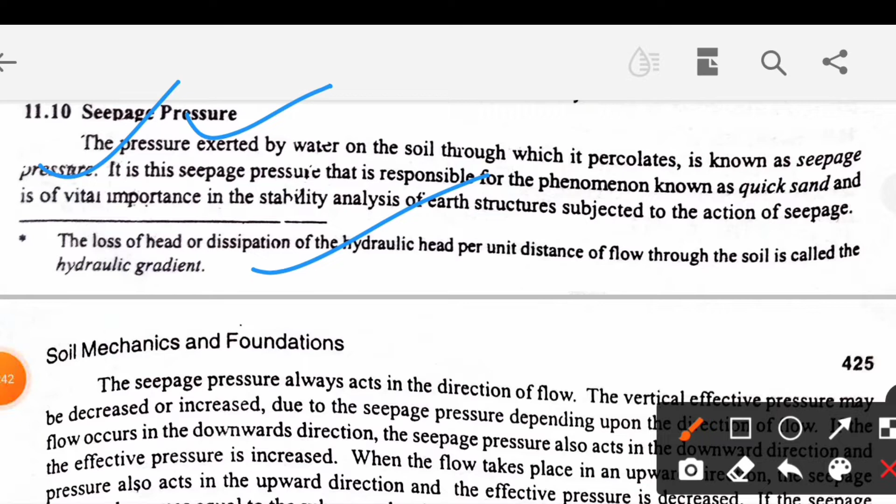The loss of head or dissipation of the hydraulic head per unit distance of flow through the soil is called the hydraulic gradient. The seepage pressure always acts in the direction of flow. The vertical effective pressure may be decreased or increased due to the seepage pressure depending upon the direction of flow.

If the flow occurs in the downward direction, the seepage pressure also acts in the downward direction and the effective pressure is increased. When the flow takes place in an upward direction, the seepage pressure also acts in the upward direction and the effective pressure is decreased.

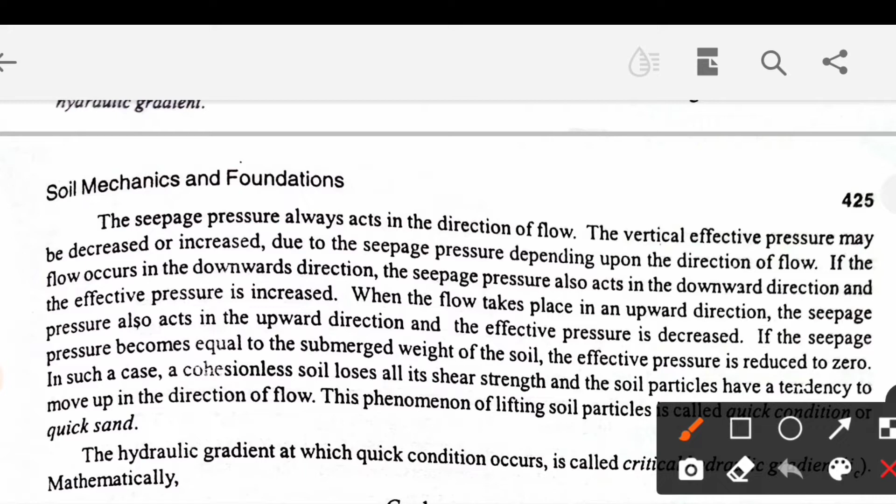If the seepage pressure becomes equal to the submerged weight of the soil, the effective pressure is reduced to zero. In such a case, a cohesionless soil loses all its shear strength and the soil particles have a tendency to move up in the direction of flow. This phenomenon of lifting soil particles is called quick condition or quicksand. The hydraulic gradient at which quick condition occurs is called critical hydraulic gradient, IC. IC equal to (G minus 1) upon (1 plus E).

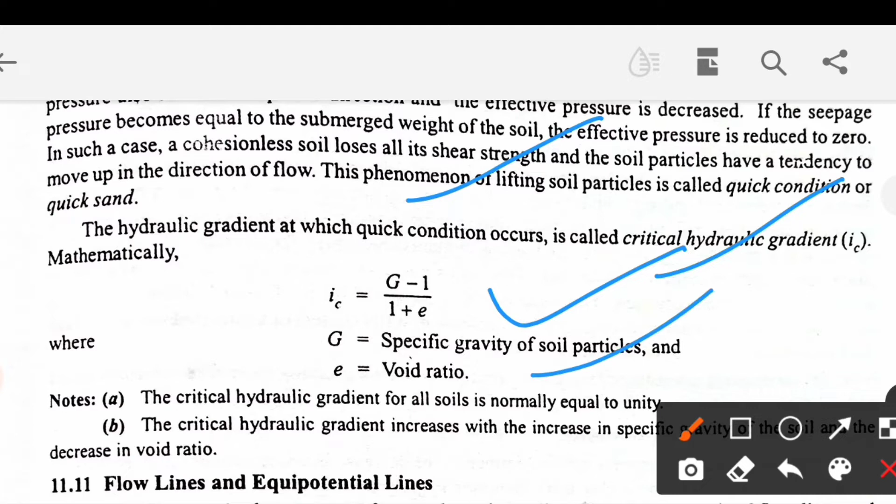The critical hydraulic gradient for all soils is normally equal to 1. The critical hydraulic gradient increases with the increase in specific gravity of the soil and the decrease in void ratio.

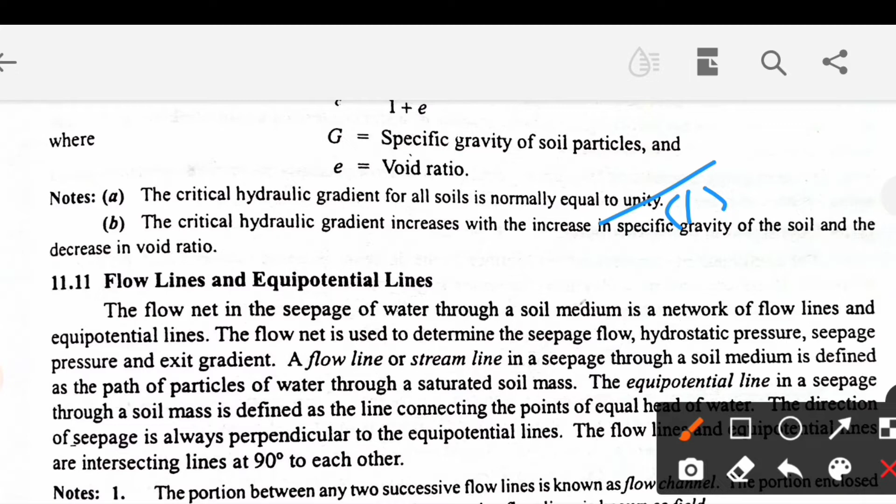After that, see flow lines and equipotential lines. The flow net in the seepage of water through a soil medium is a network of flow lines and equipotential lines. The flow net is used to determine the seepage flow, hydrostatic pressure, seepage pressure and exit gradient.

A flow line or stream line in a seepage through a soil medium is defined as the path of particles of water through a saturated soil mass. The equipotential line in a seepage through a soil mass is defined as the line connecting the points of equal head of water. The direction of seepage is always perpendicular to the equipotential lines. The flow lines and equipotential lines are intersecting lines at 90 degree to each other.

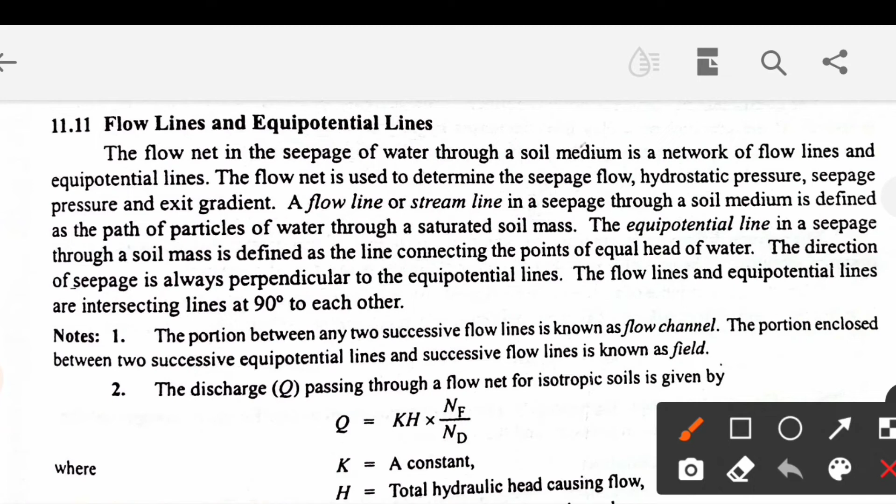Here, see, the portion between any two successive flow lines is known as flow channel. The portion enclosed between two successive equipotential lines and successive flow lines is known as field. The discharge Q passing through a flow net for isotropic soils is given by Q equal to KH into NF upon ND. Here K is constant, H total hydraulic head causing flow, NF number of flow channels, ND number of potential drops.